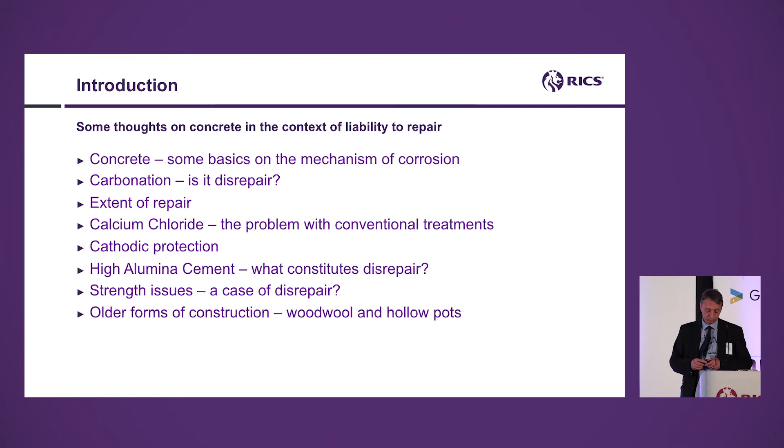I wanted to talk also a little bit about some other forms of construction, and I'll mention something on floor slabs as well, because that's sort of big ticket money when it comes to warehouses and industrial units, claims relating to those. So back to physics lessons. Why does steel corrode?

If I take two metals, in this case zinc and copper, and dump them into a little bath of, well, we'll call it sulfuric acid for want of a better material, we get a current that starts to flow between the two. If we connect them electrically, we get a current, and one of them corrodes preferentially to the other. The anode, in this case a bit of zinc, corrodes preferentially and gradually decays in favour of the copper.

Now that's two different metals immersed in a bath. Why is that different from a piece of concrete? If I take a piece of concrete, it's perfectly possible to create a corrosion cell such as that with the same piece of steel as both the anode and the cathode. And in this case, the electrolyte is the concrete.

How does that work? Concrete's solid, but it does contain moisture. So a current can flow through the concrete, believe it or not, and the degree of flow, electrical flow through that concrete, depends on its resistance. Well, that's news. And the resistance depends on its quality, how well it's been compacted, whether it contains voids, how wet it is, and all those sorts of things.

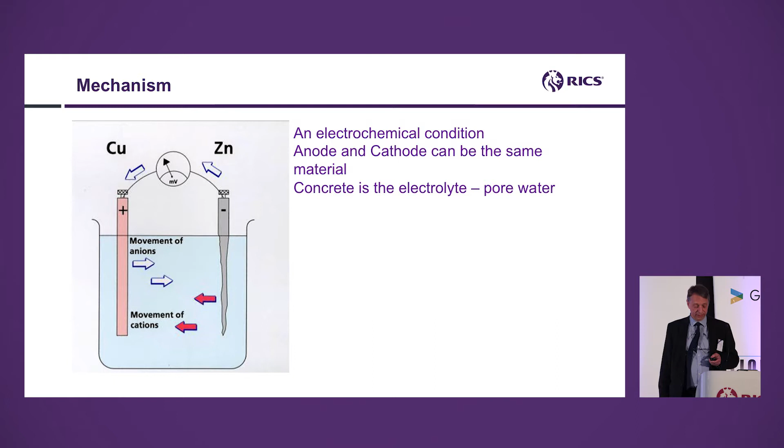The speed of decay and the degree of it depends upon factors such as the resistance of the concrete. And if I've got something that's highly conductive, it will corrode more. So that's the nub of it, if you like. That's what it's all about. And we keep coming back to this basic mechanism. That's why it's important to dwell on it.

Why doesn't corrosion occur inevitably? Well, when we make something out of concrete, it's quite a high pH environment, usually around about 12 to 13 on the pH scale, which is quite high. And what that does on a piece of steel is it permits the creation of, I was going to say microscopically thin, but it's even thinner than that, a passive layer that protects the steel.

In practical terms, imagine a building such as Centre Point, Tottenham Court Road, and imagine the height of Centre Point is the diameter of the piece of steel reinforcement. I'm talking about a passive layer the thickness of a postcard on top of Centre Point. So it's very thin. So long as that passive layer is maintained, everybody's happy.

But if something has a go at the passive layer, we're in trouble. There are two main things likely to attack it. The first is one of the most common gases in the atmosphere, carbon dioxide. In solution, that will attack the passive layer and disturb it, and when it does that, the steel is at risk of corrosion.

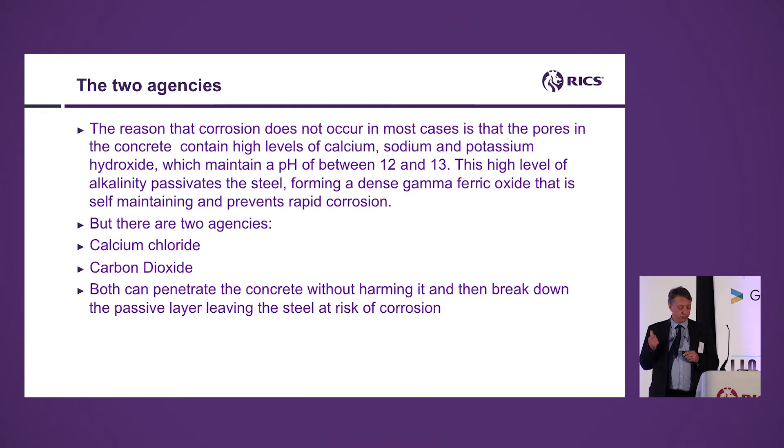Chloride problems are particularly difficult to deal with, and I'm going to come back to those in a second.

When the zone of carbonation has reached the steel, it doesn't mean that corrosion will occur - it means there is a risk of corrosion. So the first question really is: carbonation, is it disrepair? You will often go out, when conducting a survey, and measure the depth of carbonation and also the depth of cover to see whether the steel's in the carbonated layer, whether there's risk, whether it's approaching it. It's particularly important for chlorides.

I'll come back to that in a minute. If you've got a rebar close to the corner of a beam, it's got attack on two fronts, so it may be more vulnerable. If you've got cracks in the surface, the zone of carbonation goes further in, and you might end up with damage around the reinforcement. So we've lost alkalinity, we've lost the level of protection afforded to the rebar - but that doesn't mean the rebar is going to corrode.

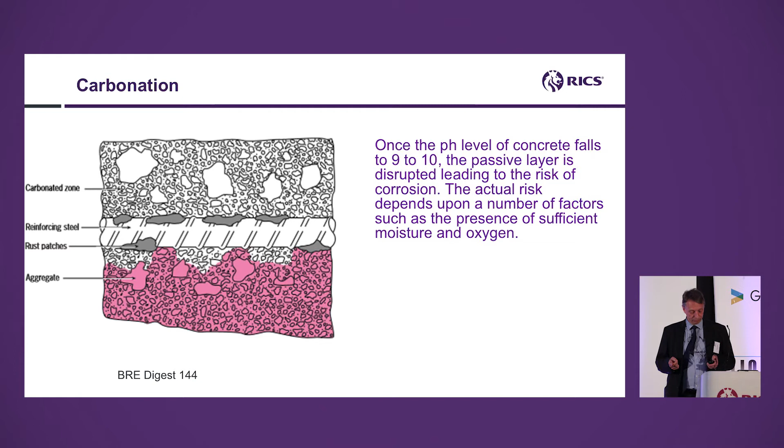Fairly easy to repair - we'll come on to repairs in a minute, but no particular obstacles there, and I don't think many people would argue with me that that probably is a good example of disrepair. It would find its way onto your schedule of dilapidations.

Suppose the carbonation had extended back to the steel for the full length of the beam. So although we've got spalling and delamination here, we've got an area yet that has not deteriorated to the point where you've got to hack it off and repair it. Would you be justified in saying, well sorry guys, I've got to hack off all of that carbonated concrete and repair it? You might try and make that argument.

Well, I haven't actually got a direct answer for you. My feeling is that going beyond that was probably not a repair that would be contemplated by the lease. But there's always shades of grey and the five tests and so on - it's easy to concentrate on this bit, but there is an argument to say you should carry on further than that. Would that be disrepair? Would that be a repair within the contemplation of the parties?

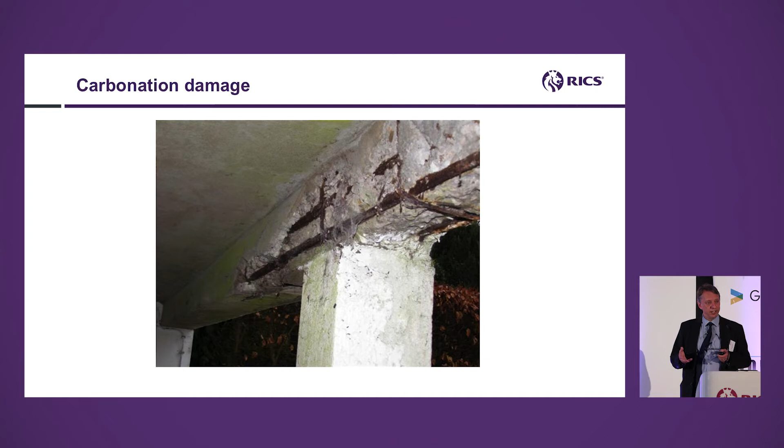Possibly not, but it would depend on the circumstances. If the corrosion had taken place and it hadn't resulted in spalling, but was nonetheless there, that might be something that you would want to consider.

I can't actually see that photo from here, so you've got a better shot at it than me.

Following the Post Office and Aquarius case, it was built like that. Ideally, it would have been built in a different way, but it wasn't. Can you see any evidence of disrepair there? Not really. There is some staining, I grant you, but at the moment nobody's proved to me that we've got corrosion or deterioration. So I might argue Post Office and Aquarius in this case, and no need for repair, and certainly no need to start putting waterproofing on a ramp, changing the ramp to something different in a way.

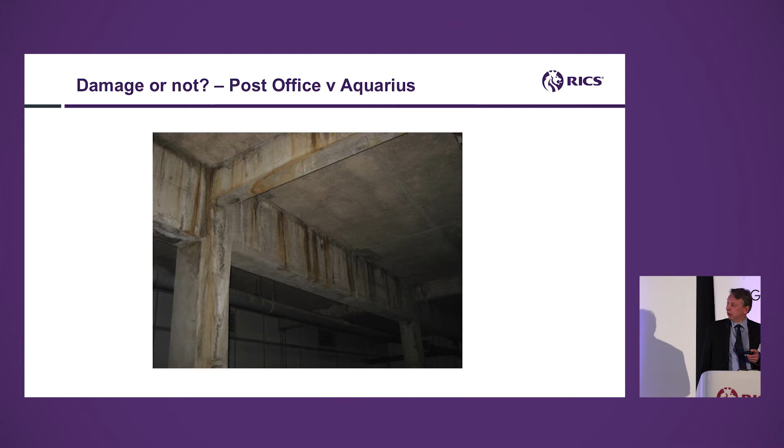So, as I said, carbonation's fairly straightforward to deal with. And a typical spec would probably start off with a hammer test, or cleaning it first, and then carrying out a hammer test to determine delaminated areas and so on. So first question: is the hammer test and the cleaning process something that you're going to charge, or the tenant's going to be responsible for, or the landlord if he's responsible for external repairs?

Well, it's an essential part of the repair package because you can't really specify it until you've done that. But unless you've actually identified any disrepair as a result of that, then maybe you're not going to be able to recover those investigation costs. There's quite a lot of work involved in doing that. And actually, how do you do it? Because you need a scaffold up or you need cradles or something. So there's the first challenge for us.

The actual repair system for carbonation is quite straightforward, really. No rocket science here. Break it out, expose the steel, clean it, possibly prime it depending on the system you're using, put mortar back. And then what do you do? Do you leave it like that, or do you have to then put an anti-carbonation coating on it, or a levelling coat and an anti-carbonation coating? My guess is that people like Sika and Mapei and Ronacrete will come with their nice little neat package that says we give you a warranty for 20 years or whatever, but you have to do this, this, this and this.

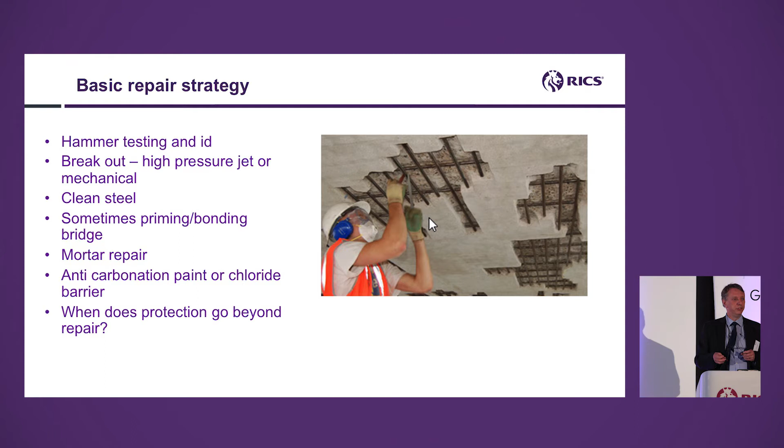But just be a little bit cautious. I had a case a couple of years ago where the schedule of dilapidations was requiring the tenant to, or attempting to require the tenant to put an anti-carbonation coating on, and we argued successfully that that was not repair.

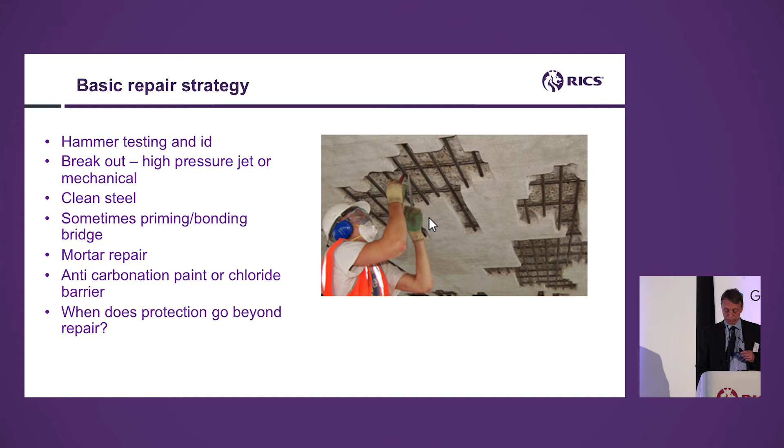Now, that's all easy stuff. Chloride is a different kettle of fish, and the reason is because we have potentially conditions of high conductivity, and high conductivity equals potentially high corrosion rate, more damage, and so on. There are two issues.

With carbonation, it's corroded, and usually when steel corrodes, it expands and forces the concrete off. If you've got sufficient chloride, you don't always get that kind of layered corrosion product. You can get something called pitting corrosion, where the steel actually pits, it disappears, it dissolves. So you might not know that you have a problem. You probably will do, but you might not know, particularly with pre-stressed tendons. That's problem one - you don't necessarily have a physical manifestation of the decay. There might be some cracking if it's lost its strength.

Problem two is this nasty little thing called an incipient anode effect. If you remember my first slide, I said you can have a piece of steel, and if you vary the conditions on that piece of steel, you can get a corrosion cell. So with chloride-affected concrete, high conductivity - we repair the area that's spalled. What do we get? We've set up a new corrosion cell between the bit we've just repaired and the old bit. The process starts again - incipient anode. So you're chasing your tail. You carry out a repair on day one, and on day 365, there's evidence of corrosion still continuing. You haven't actually achieved anything.

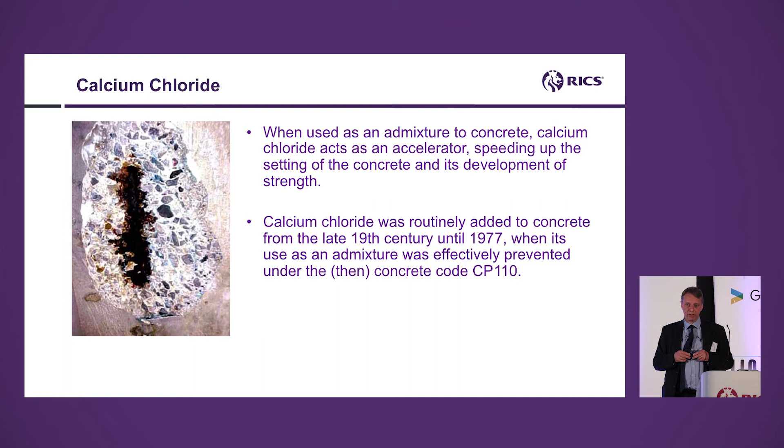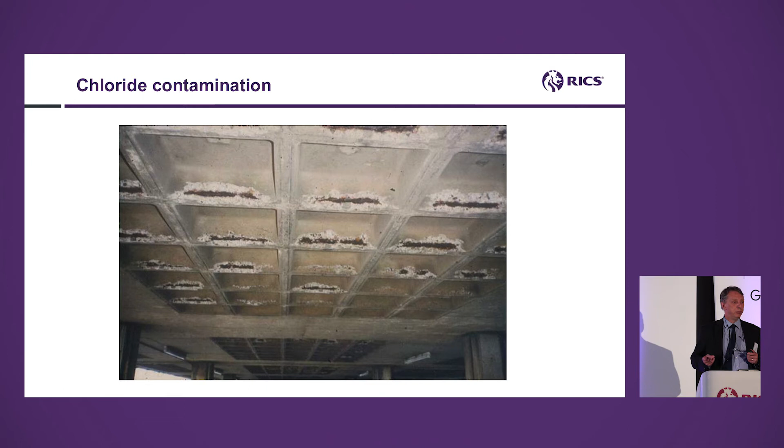So, two things: it's difficult to repair, and it may be suffering from pitting corrosion. So if you're now preparing your schedule of dilapidations, you might want to be able to satisfy yourself that you've established the level of disrepair.

Now, George Ballard, if you're going to his session this afternoon, is going to do some more on NDT, non-destructive testing. But I just thought I'd mention half-cell mapping, because this is one method you may employ - you'd certainly commission it, you probably wouldn't do it yourself - where you're attempting to measure the risk of corrosion having affected the steel. In this case, you're measuring the potential difference. You're drilling a hole, connecting electrical contact to the steel bar, and then measuring currents. This will give you an indication of whether corrosion activity is taking place.

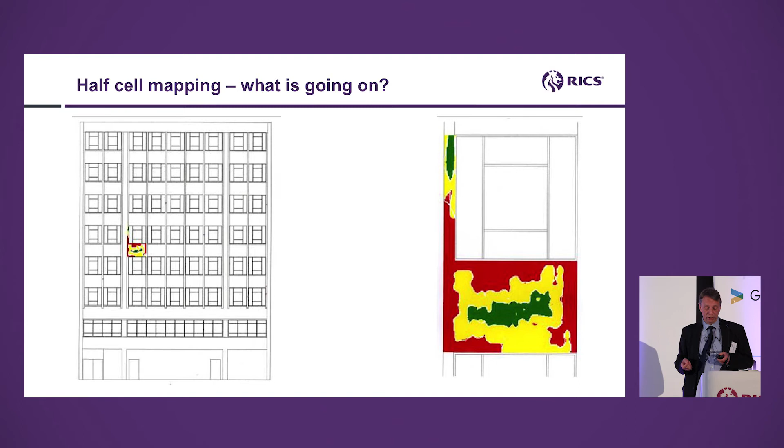So we can carry out repairs normally, and then sit back and wait for the inevitable to happen. Another method would be to use cathodic protection, and that's a system that is growing in popularity. But it is protection - is protection repair? Might be. So we've got two broad systems.

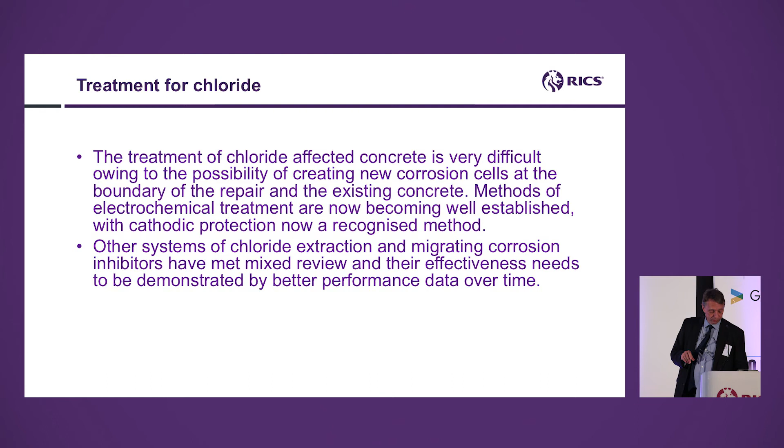If you're into car parks and repairing those, you probably will come across the galvanic type, which is just like a little zinc pellet wrapped in mortar with some wires sticking out of it. You open up the concrete, put this contraption in, attach it to the steel rebars, and it merrily, in a somewhat uncontrolled way, corrodes sacrificially and prevents the steel from corroding further. So it's relatively cheap and cheerful. You haven't got much control over it, it doesn't last forever, and you can't really monitor what's going on. But it's a valid repair system where you've got high chloride.

The other is an impressed current system, where you put some anodes in - that could be a mesh, it could be a paint, it could be little probes that you insert and connect up to a DC current. You put a current through the whole thing, and that reverses the corrosion currents occurring in the steel. A useful means, because it means you don't necessarily have to open up all of the chloride-affected concrete, or stonework for that matter, and hoik out those areas vulnerable to decay. So it's a great technique, and one that is gaining in popularity. It sounds a bit sci-fi, but it's quite straightforward, really.

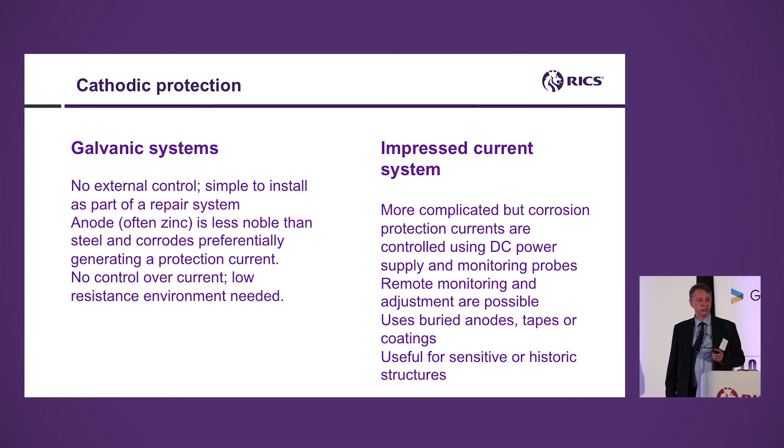What are the options here, for the face of a building such as this? Well, you can carry out entirely conventional repairs. You can hack it all off, expose the steel, repair it locally, put it all back together again. Or you could do the bare minimum, grout all the cracks, stop the water getting in, that'll arrest the corrosion, job done. Or you could do a mixture of all those things and add cathodic protection.

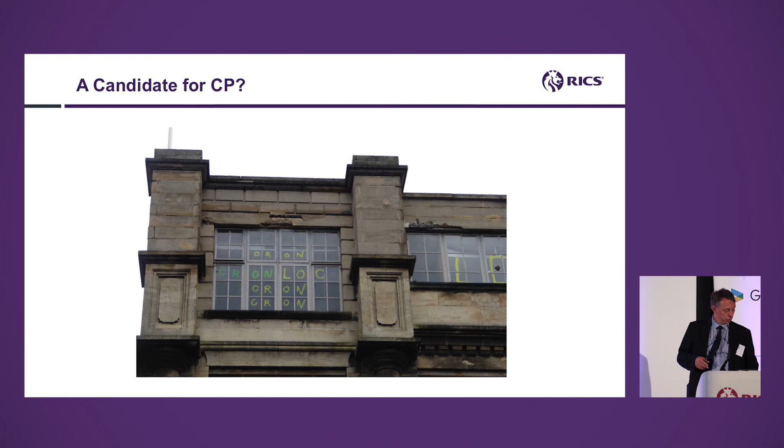That system was the case that came up in Gibson Investments Limited v Chesterton, which involved a steel-framed building. Now, I know I'm digressing a little bit, but the principles are the same. We had here a corroding steel frame, common in London certainly, and then from Manchester from about 1905 onwards. Usual stuff, Regent Street disease is what we call it here, corrosion of the frame. How are you going to deal with it?

Well, we'll do some precautionary work, stop the water getting in, or we will carry out wholesale repair, we can take the cladding off, put corrosion protection in, or we can put cathodic protection in. Now, cathodic protection does not repair the system. It doesn't repair the steel. It just arrests the corrosion, stops it getting any worse.

So is that a repair or not? Is it simply a protection system, or is it a repair? This was a sort of case that vexed the court on that question. I think the eventual conclusion was that it could be a valid system, but you need to look at the merits of it in the round. What are you trying to achieve? It's the 5-point test again.

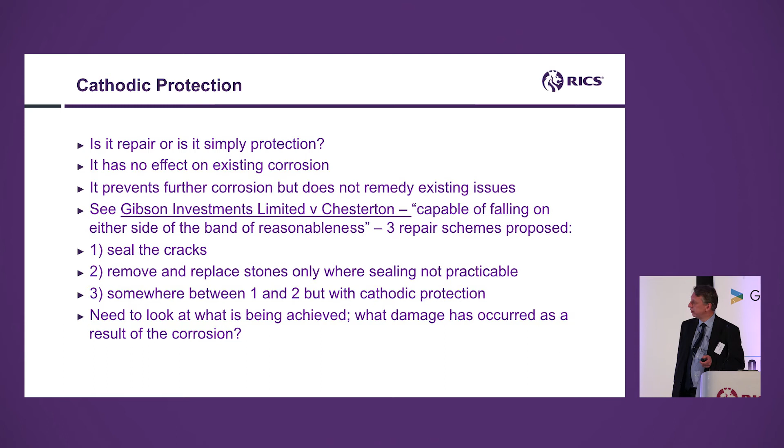HAC, high alumina cement concrete, is one that's vexed people for many years, certainly since about 1974, when bits of it started to fall down, buildings started to collapse, although generally it was only the roofs that collapsed. What is HAC? It's a material designed by Lafarge back in about 1925. They were trying to get something that went very hard, very strong, very quickly, and had high chemical resistance. It was used quite often in construction from the 50s and certainly through the 60s to the early 70s for the manufacture of precast beams particularly and some other components. Pierhead were one of the major companies that supplied this material.

What's the problem with it? The problem is that when you mix it up and it starts to set, it's an unstable product. Mineralogically, it is unstable, and gradually the minerals in that HAC go through a process called conversion, where they change state, moving from the unstable state to a stable state. Associated with that change is a loss of strength. Concrete actually becomes more porous. Because it becomes more porous, it loses strength.

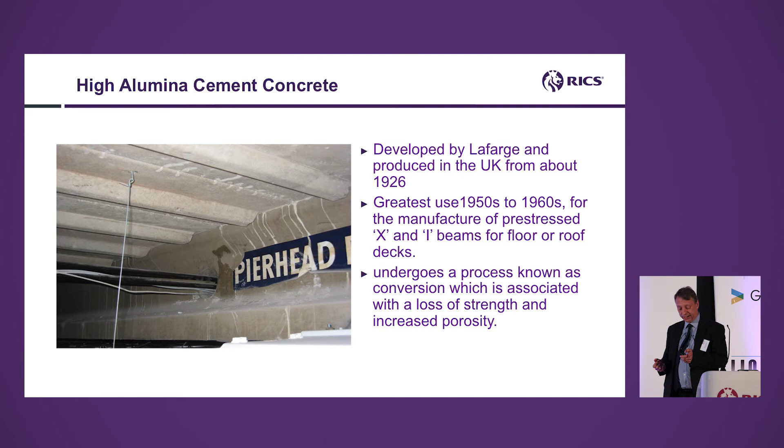Now that's all fine. If you've done your mathematics as an engineer based on a concrete strength of 21 newtons, that's fine, it works. But if you did your sums on a concrete strength of 50 newtons say, that concrete reducing in strength could be embarrassing for you. So the question is, is the mere existence of high alumina cement enough to trigger disrepair? Does somebody need to do something about it? If you've got a system that's working perfectly well, but it's lost its strength, does the tenant need to do something to restore that strength?

Answer, probably not. But again, you need to go through all the process of investigation. In the cases I've been involved with, we were working on a shopping centre in Liverpool not so long ago - from an investment point of view, it's not very satisfactory, is it? You've got something that's definitely a bit dodgy. From an occupier's point of view, well, I can still use it for my retail purposes. It's not lost its strength beyond doubt.

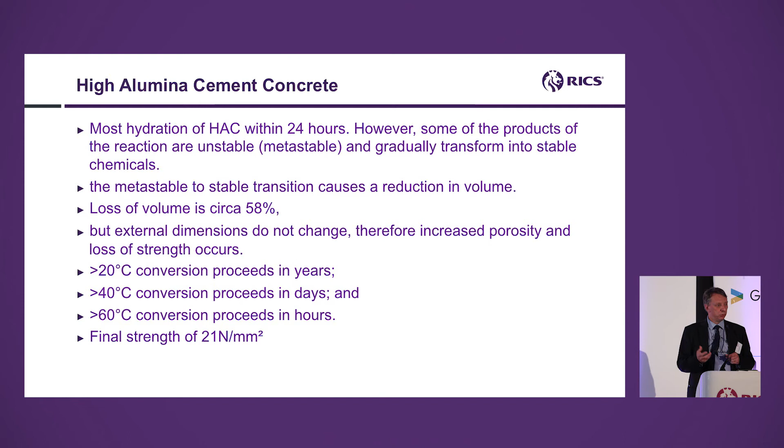There's a system you can use, BRAC rules, for working out whether you've got a structural problem or not. And if you work hard at it, you can prove the floor shouldn't be there, it should have collapsed - well, that's not very helpful to anybody. It's clearly still there. We had to prove it by loading out the floor with water tanks and measuring deflection. So the calculation method that BRAC rules give us proves that it doesn't work, but it's still there - we proved that it worked using water. So it would be hard to justify a requirement for anybody to do anything about it, particularly if the building could still be used for the purpose it was intended for.

London Borough of Camden v Civil Aviation Authority, this building could still be used as an office, but there was a question mark over the structure.

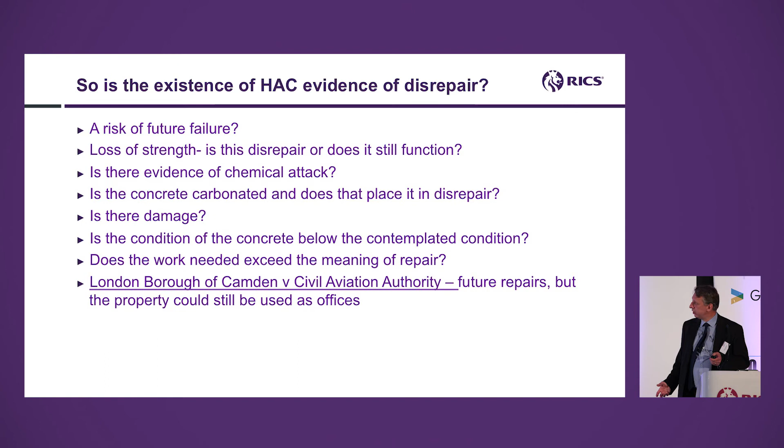A few years ago, I had a case on a building called Great Northern House up near King's Cross, where we didn't have HAC, but we did have a big question mark over the strength of the floor. I was on the tenant's side, on the team, and the landlord was proposing to strengthen the floor using what was then a new process called carbon plate bonding, which is where you clean the surface off and stick a strip of carbon fibre using resin onto the floor, and that reinstates its flexural strength.

Great. But where's the disrepair? From the landlord's point of view, he had an investment that was distinctly dodgy because he had to put floor loading notices up everywhere. From the tenant's point of view, well, I'm using it as an office and it's fine. You're telling me that an office should be 2.5 plus 1 floor loading. Actually, I don't need anything like that. It's working fine. I've got no deflection, I've got no disrepair. You can go whistle.

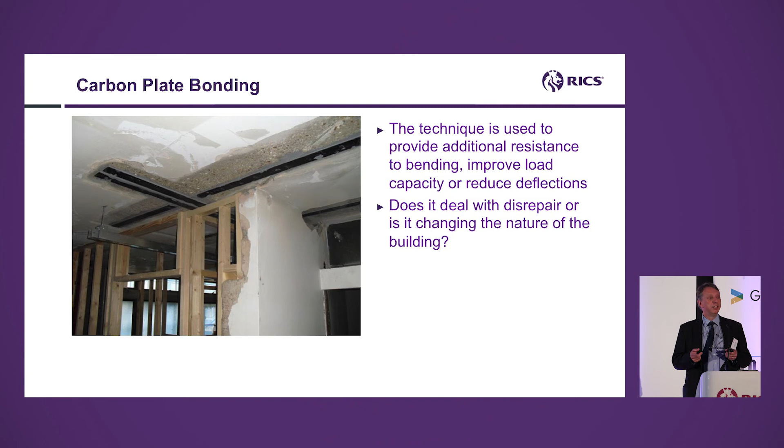Didn't stop it going all the way to the High Court. Regrettably, they settled it before we got an answer, but it would have been great fun to have gone through that process. Go back to my HAC - if we've got deflection, if we've got a serious problem structurally, sticking carbon fibre on the underneath of it might be one way of dealing with the problem.

Slightly older form of construction, wood wool slabs as permanent shuttering. You're all familiar with that, I hope. The big issue is that we get voiding round the reinforcement bars. So it's going to be in from the start, built like it.

What does that do? Does it compromise strength? Probably not, but it does compromise fire protection. Might arguably compromise corrosion protection, but I'm not sure about that. From investors' perspective, wood wool slabs permanent shuttering is a bit of a no-no. Is it disrepair? Probably not, actually, because it's there, it's not leading to any problems. What would be the case if you had a fire and there was more extensive damage? I don't know, interesting conundrum.

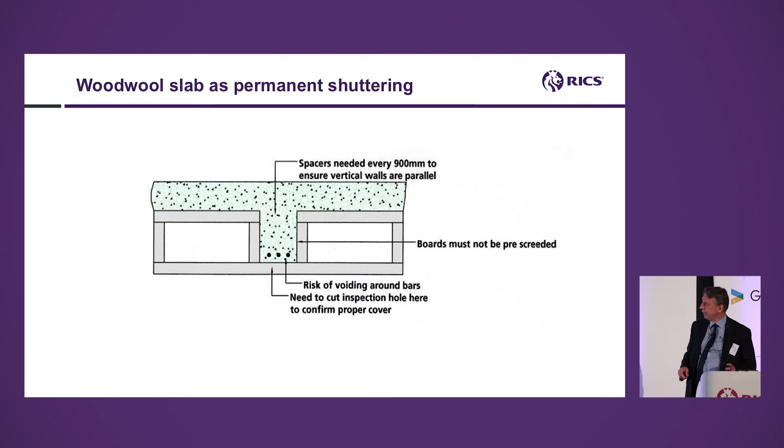Similarly, hollow pots. Deleterious materials and all that always go on about wood wool slabs. They never mention hollow pots, but the problem is exactly the same, and that is the risk where you've got spacer tiles, the risk of voiding around the reinforcement concrete.

I got involved in a case in Holborn a few years back where a tenant moved in. It was - can I say this? Well, it was an old Woolworths store, long gone. Tenant took the upper parts and was converting to offices. District surveyor came along and said, can you prove to me that we haven't got voiding, because I'm worried about fire protection. No, we can't.

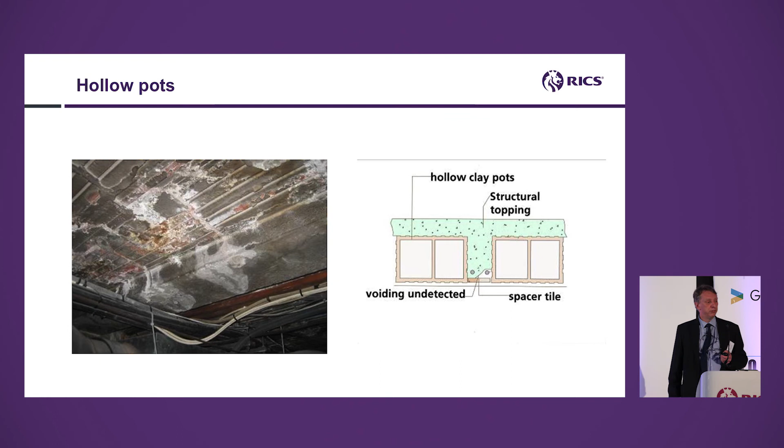Investigated it. Yes, we have got voiding, needed wholesale repair. So there was an almighty row about who was responsible for hacking off all of the spacer tiles and putting in gun-applied concrete afterwards to restore the fire resistance. But it wasn't disrepair. It was always built like that.

I just wanted to put this in because Twinmar - you all know about roof lights and stuff - but it did also cover condition of the floor and the concrete floor, and there was some commentary about whether if the aggregate in the floor was exposed, it was disrepair. It was, and the landlord was entitled to recover.

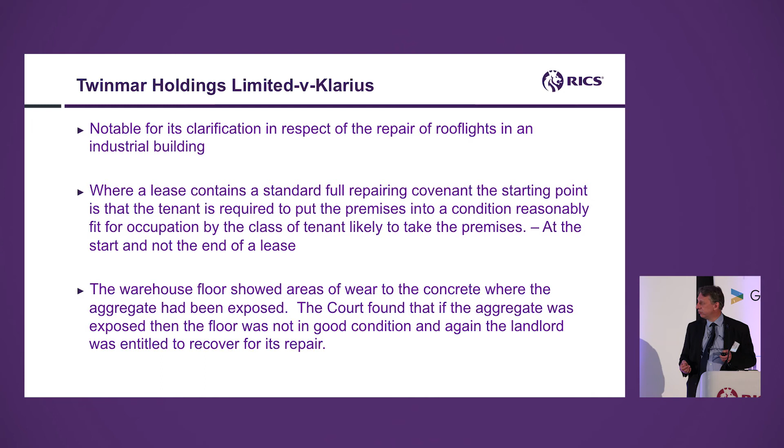So that leaves me an introduction into floors, ground-bearing slabs. Now, I was rummaging through the internet, as you do, prior to this. I was actually looking for statistics to throw at you. Didn't find many. But there were a few contractors that were reporting a huge increase in the number of concrete slab repairs. I don't know why, whether it's because as surveyors we've come more alive to the problems.

This was an interesting case. This was actually a warehouse that, believe it or not, was only a couple of years old. And what we're looking at here is the sawn contraction joints in the floor.

You know what this is all about. If you've got to control shrinkage, so you want cracking to occur where you want it. So before the concrete is fully set, you cut in a joint, 5mm, a few millimetres through, 50 mil through the depth of the slab, with the hope that when you get the shrinkage, it will crack there and nowhere else. That's fine. The trouble is that concrete does shrink, and it particularly shrinks during its first few months of life.

So the filler that you put in that joint needs to be able to accommodate shrinkage. And that shrinkage is going to be greater during the first few months of life than it is after the first few months of life.

What is supposed to happen is that at the end of the defects liability period, there should be a provision in the contract, if specified correctly, for the contractor to go in and remove the initial flexible sealant and replace it with something harder, of higher shore hardness. Now that didn't happen in this case, so the tenant was left with the original flexible sealant that should have been replaced. He still had it.

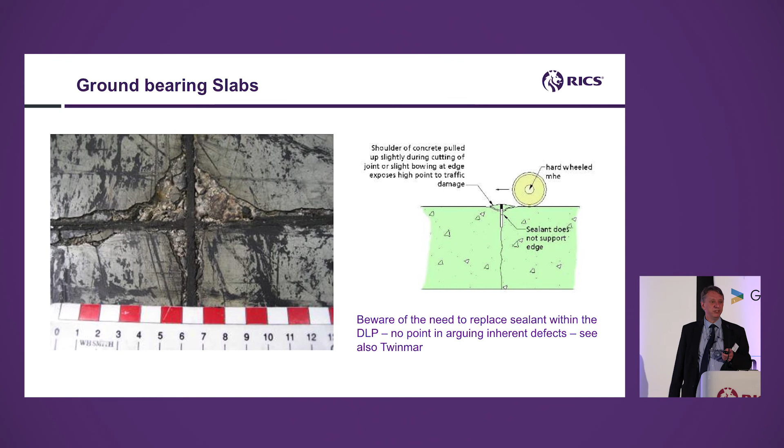Maybe if you're representing a tenant taking a lease on a new building, is there provision for replacement of these joints? Because doing several hundred metres of that kind of repair is quite expensive.

If you don't like conventional reinforced slabs, you use steel fibre reinforced, because you can lay much larger bays in one go. These are highly engineered floors, not just subject to normal mathematics. They're a particular product, and this was actually a floor on a very, very large distribution warehouse in Belgium.

This wasn't a dilapidations claim as such, but we were involved in a wrangle between landlord and tenant over the cracking. You can see what I've termed very extensive map cracking in the surface. Why is it there? Well, because when you power float the floor, all the cement-rich material comes up to the top, shrinks, and cracks like that.

Is it disrepair? I think probably not. I think it's just part of what you get, it comes with the territory. I would say that in this particular building, possibly due to construction methods, the map cracking was much more severe than I'd seen anywhere else.

We were concerned that over a period of time you would get more wear, individual lenses would pop off, and you'd get deterioration and so on. In the end, the landlord agreed to broadcast a very thin resin over the whole floor to help seal those cracks and prevent deterioration. I've no idea what the law of dilapidations is in Belgium, but this was an interesting case.

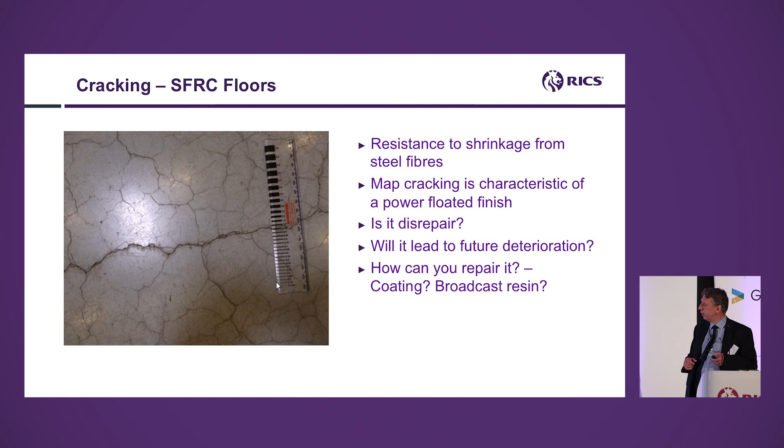And then, almost finally, another warehouse in Belgium where we had some quite profound cracking in the floor. This was sufficient to cause great alarm and despondency, and the tenant started to withhold rent. Now again, we're talking Belgium, and this is not a UK issue, but the principles are the same.

So why have we got all this cracking? They put resin in and tried to repair it. The big problem was that as they put their materials handling equipment over it, that shook around a bit and they lost a pallet. There was concern over deterioration and so on. So first off, why is it cracked? Is it just shrinkage?

What we found is that they put their racking in, and this is serious racking, going up about 10 lifts, with all their bottles of vinegar — it was a food distribution warehouse. There was quite a big load on these legs. They'd gone in fairly early, so they kind of pinned the floor in place and restricted its ability to shrink as it wanted to, and so therefore it had cracked.

But we went a bit beyond that, and we found that the slab, which had been designed at 135 millimetres thick steel fibre, was actually only 113 millimetres in places. Logic says to you, well, if we needed 135 and we've got 113, it's not going to be strong enough, and we ought to be restricting the amount of load that's put on those racks.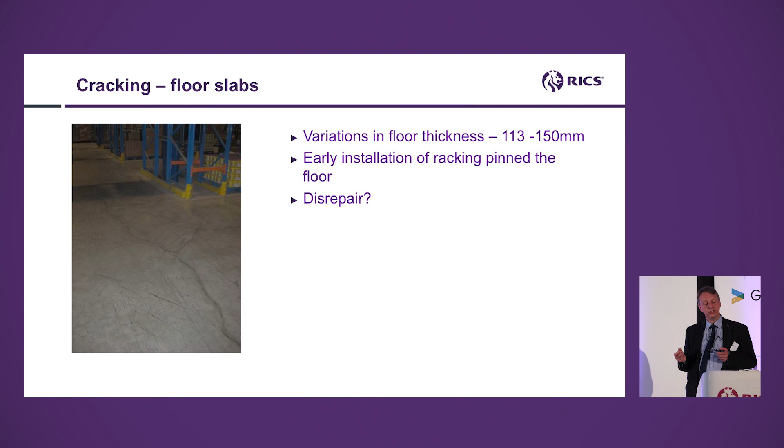So you had zones of thick floor, thin floor, thick floor, which obviously affected how it all shrunk and moved around. That was a rather long and rambling way of illustrating some of the problems you get with steel fibre reinforced floors, or any floor actually, and some of the wrangling as to whether you've got disrepair or not.

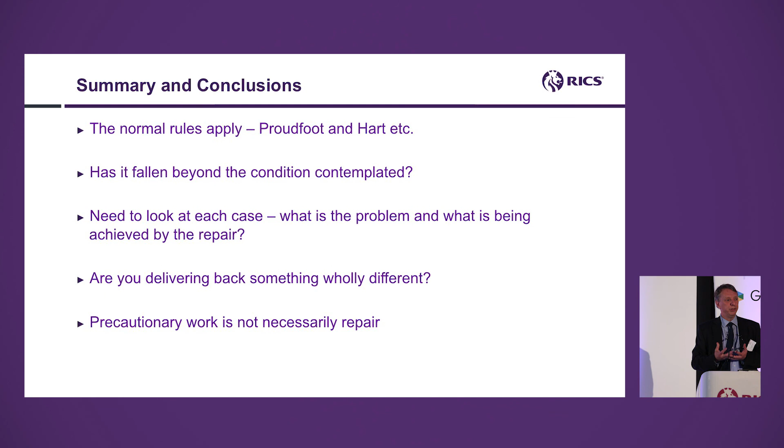Summary and conclusions. I've explained how corrosion works, an electrochemical problem. With chloride, you might have to deal with it electrochemically, possibly with a more robust form of repair. Concrete deteriorates, it carbonates by itself, it loses protection - is that disrepair? I don't think it is. What about high levels of chloride? Yes, you could have a problem there, particularly with pre-stressed concrete, where the thresholds for chloride content are much lower.

What are you achieving by the repairs? Is your level of repair more than was contemplated? Are you trying to reinstate a 50-year life, as opposed to just getting the building limping through? Or what is the standard of repair you've got to achieve? Remember that precautionary work - reinstating life or protecting against further deterioration - might make good sense on the balance sheet, but is it necessarily repair?

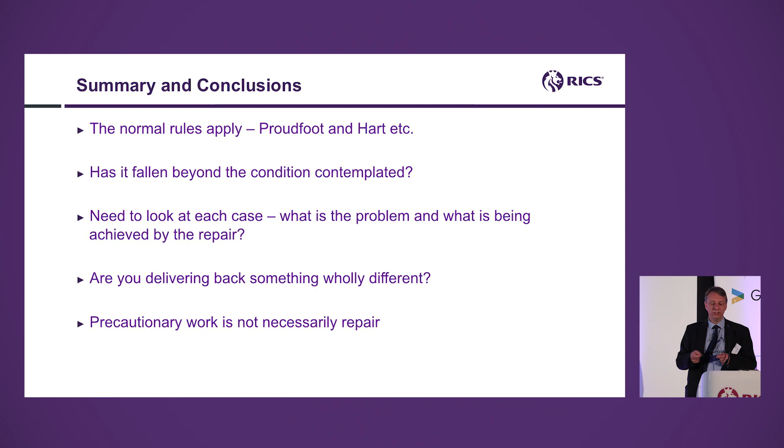First one: is carbonation, could it be argued, an inherent defect? Well, there's no such thing as an inherent defect really in Dilaps, is there? So, answer, I don't like that question, it's not going to get you very far. But it is something that goes wrong, it will happen, it's part of the normal process of ageing and deterioration of concrete. So my feeling is it's not in itself disrepair, but it could lead to problems, in which case you may well have an obligation to do something about those problems. Does that make sense? Good.

I'll try another couple of questions that you won't like then. Do you feel that the often-used epoxy coating to warehouse floors is a genuine method of remedying disrepair, or is it just for aesthetics? I think, again, you need to look at the circumstances. You've created yourself a nice little repair liability for the future, whether it's epoxy or polyester. Epoxies tend to form more of a surface skim and therefore are easily flaked off - you're covering up something. But on the other hand, what are you trying to achieve by the repair? Are you making it look nice? Are you stopping it dusting? If you've got a dusty floor, or one that's been heavily patch repaired, it might be a means of achieving serviceability. So I think that's a difficult question. I quite like that question, but it's a bit more of a difficult answer.